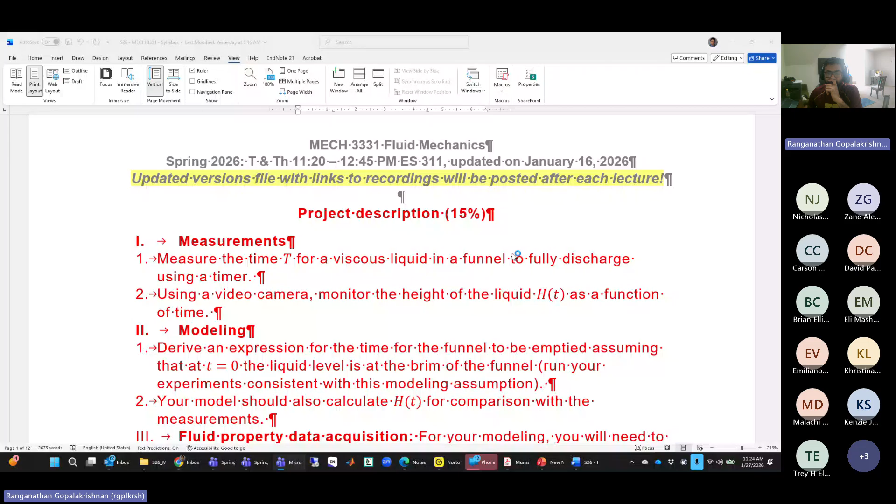So if this project is included in the course, we're going to have a grade structure that looks like this. There will still be 3 midterm exams. I might not have questions covering explicitly Unit 1, because the experiment I'm proposing with the funnel really draws concepts from Module 1, so we won't have a separate quiz on that. There will be 3 exams covering 2 modules each, and then there's the final.

Which I said was originally 45%. Now, if the project is worth 15, that would become 30. And I'm inclined to make the project go up to like 30% so that the final is just another exam, so there's less pressure. You can show up, take the exam, and it's basically a demonstration of what you've learned throughout the course. The project becomes something that's hands-on and will test you. I'm pretty sure that's how I designed it, so in my objectives, your objectives, both will be satisfied.

Sound good? I don't know about a full 30% for the course project, but I would be fine with like 20%. Okay, yeah. I was thinking - these exams contain 5 problems in 75 minutes. This one contains 6 problems in 120 minutes, so I'll try to tweak this. It won't be 15, it probably will be something between 20 or 25%, and the project will be the remaining. So that would make this what? If this is 20, that would make this between 20 or 25%.

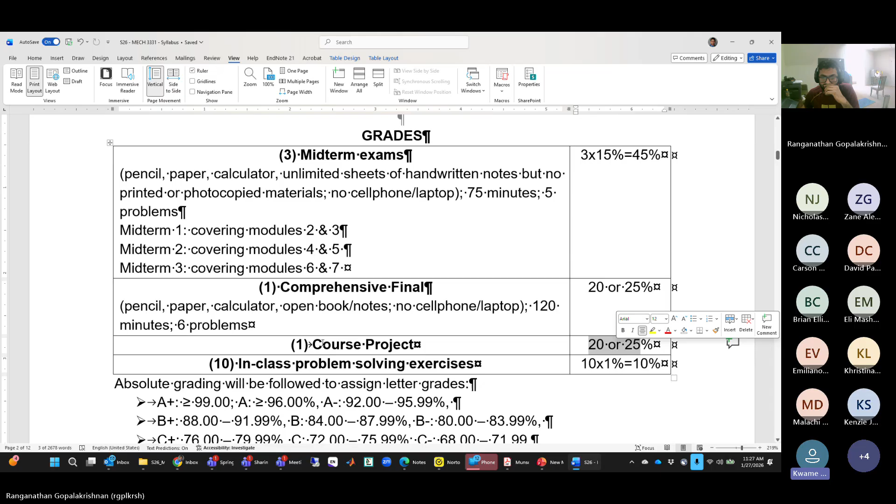And my second question was, with the questions we're answering about the fluid system we're going to create, are they going to be organized so that as we go through each section we'll be able to answer them more completely, so that we can start working on them now?

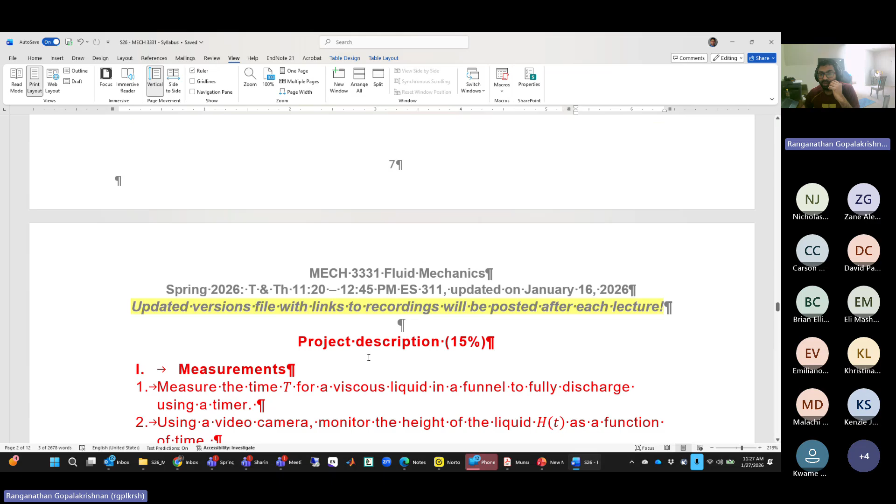My hope is to get you to do the hands-on work of setting up an experiment - a camera, funnel, liquid - and doing the image analysis. And on the modeling side, doing some derivation for the exact geometry of the funnel, taking into account the viscosity of the liquid, using control volume analysis.

The report writing part, I will release a template. It's essentially 3 or 4 pages. It will have specific questions or sections where it says enter this information, with a blank or given space telling you exactly what's needed. So you just fill that out, and that's it - you don't have to write a free form report, which would take much more time.

All right, thank you. Yeah, the goal is not to get you too drawn into report writing. The goal is to make you do some work, get your hands sticky.

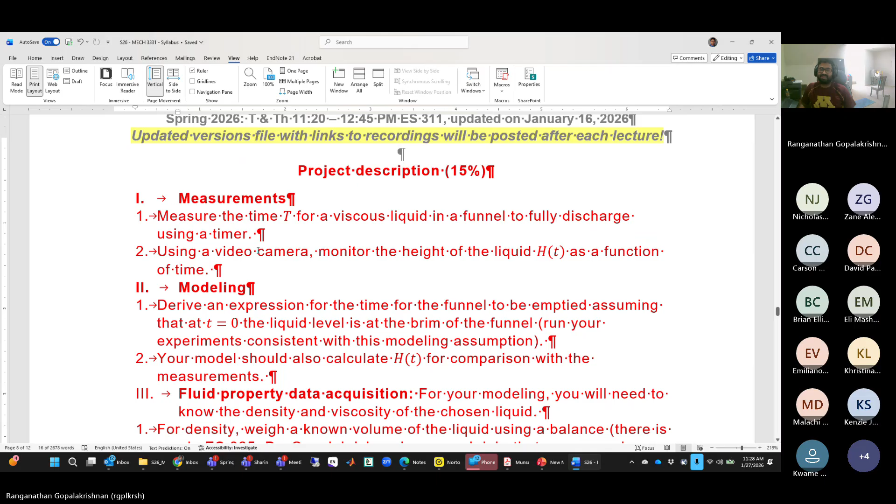All right, okay, so let's move on. We have been discussing fluid properties. We previously discussed up to section 1.5 in the textbook, which covers the ideal gas model - this was the last thing I talked about last time we met. So P equals rho RT is the ideal gas law or model. It's the equation of state that constrains the state variables - pressure, density, and temperature of a gas - under specific conditions or assumptions. There are a lot of assumptions; we're not reviewing all of those, we don't need all of them.

But the most important assumption is relative to the condensation point of the gas - the P and T involved need to be low pressure as well as high temperature. For example, if you're using this equation for superheated steam, it has to be much hotter than the boiling point so the chance of it condensing back is very low. As well, you can take nitrogen at room temperature and pressure, because nitrogen's condensation point is very low - it's exactly around minus 196 degrees Celsius at 1 atmosphere pressure. So if you're dealing with 1 atmosphere regular conditions at room temperature, nitrogen is a gas, and ideal gas is an excellent model for nitrogen.

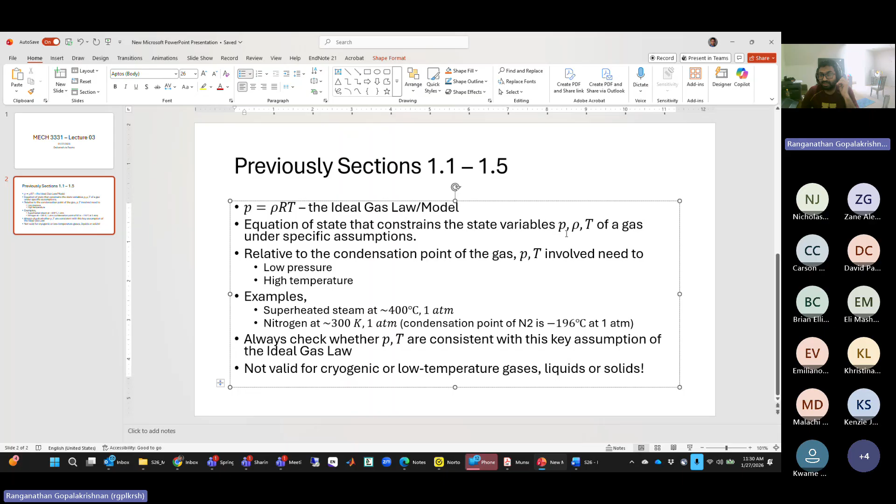So if I ask you a question - how would you get the density of water at a specified temperature? Any answers? Would it be its mass over volume? Yeah, you'll have to look up a data table where people have actually measured by weighing a known volume of water, recording its mass very precisely, and then telling you what the density is. That's the only way to know the density of a liquid if you were to look it up.

Okay, so the message is don't use ideal gas law, especially for liquids. It's completely inapplicable. Clear?

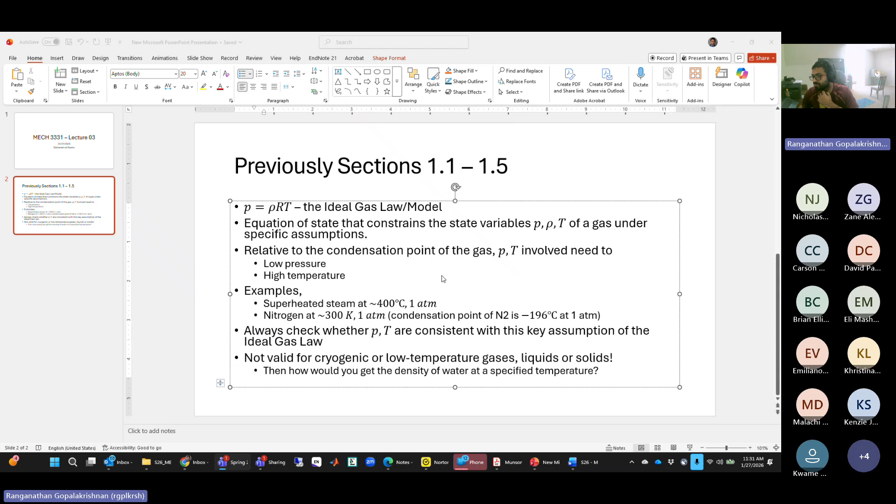Okay, moving on. The next important property we are looking at is section 1.6, viscosity.

So viscosity, you have a lot of daily experience with viscosity. Can you use some simple words to tell me what it is? Don't use any technical word like shear or anything. But what is viscosity in your thinking?

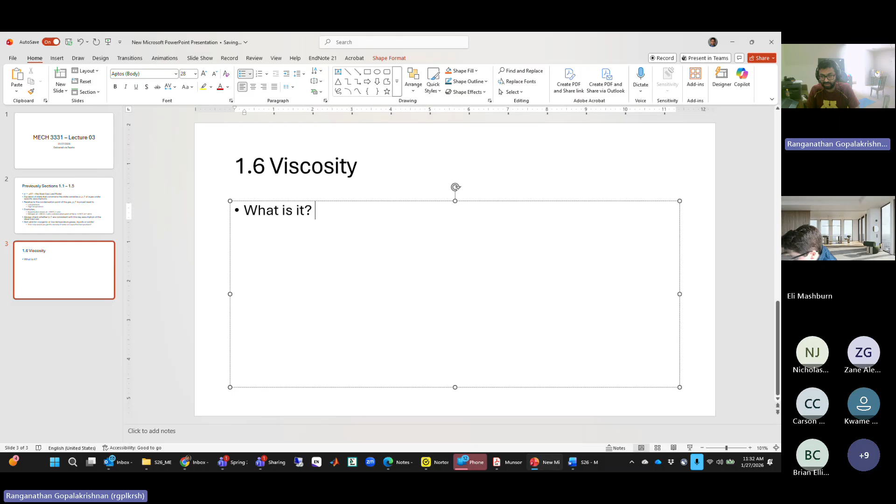The thickness or flow rate of a fluid, like how easy or resistant it is to flow. So when you said thickness or flow rate, what you mean is it is the tendency of the fluid to resist flow, or we can say a measure of how easily the liquid or fluid can flow, correct? Yeah. Okay. Any other responses? Thank you, Trey. Thank you, Kwame.

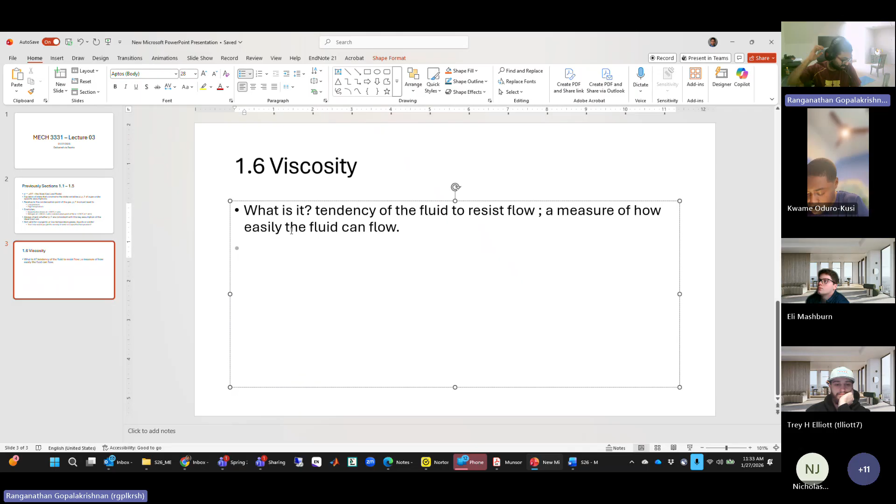How else would you be able to explain viscosity to somebody who is not a mechanical engineer? Fluid stickiness. Stickiness is not exactly viscosity, though it kind of is. What you mean by stickiness is kind of what he said before, because if it is sticky, it's going to resist flow. That's what I think you mean, correct? Okay, good.

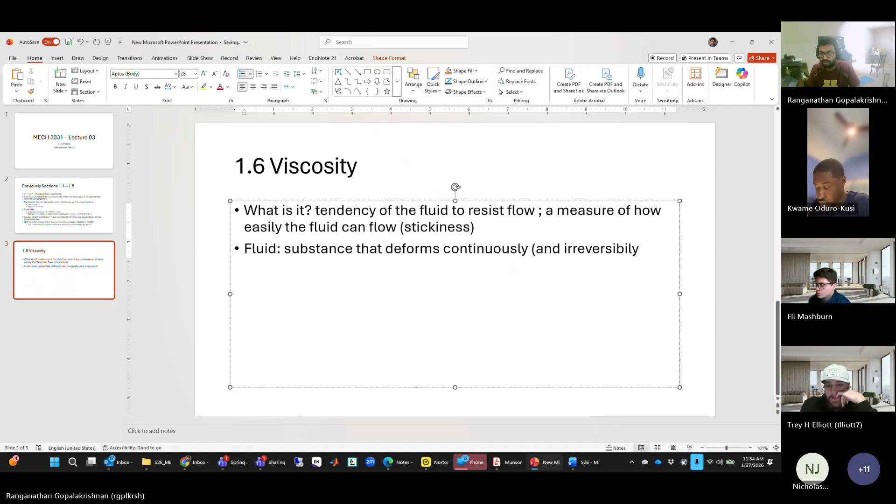All right, so the book talks about viscosity in a little more formal way, and we'll see that. So we talked about fluid. Can you recall the definition of a fluid from two lectures ago? A substance that deforms continuously. Very good. Substance that deforms continuously and also irreversibly when acted upon by a shear force or stress with no minimum threshold.

Okay, now when we talk about two liquids, consider two liquids. We'll take the familiar thing that we all know of, which is water. And we'll take something that's more resistant to flow, or more viscous than water. What can we think? Honey. Honey, perfect. Consider two liquids, honey.

So if you do an experiment that looks something like this, let's say you have an inclined plane, and you have a dripper which constantly drips water, and another dripper which constantly drips honey. They both start at the same time and start sliding down or flowing down. Which do you think would have flowed for a longer distance under this condition, where this incline is at some angle with respect to the horizontal?

Water, this would be water, right? If I didn't label this, you would come in and say this must be water and this must have been honey. If you were the forensics person investigating something, this is honey, this is water, right? Trey, can you tell us why honey would have flown a lesser distance?

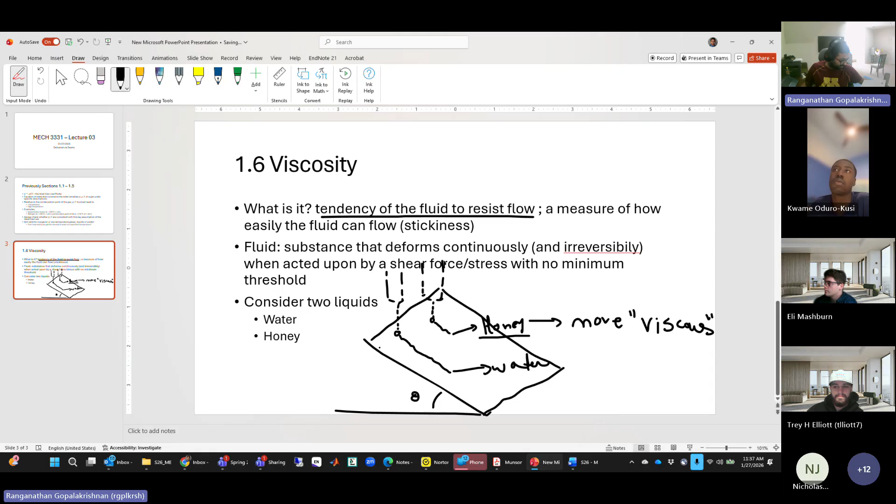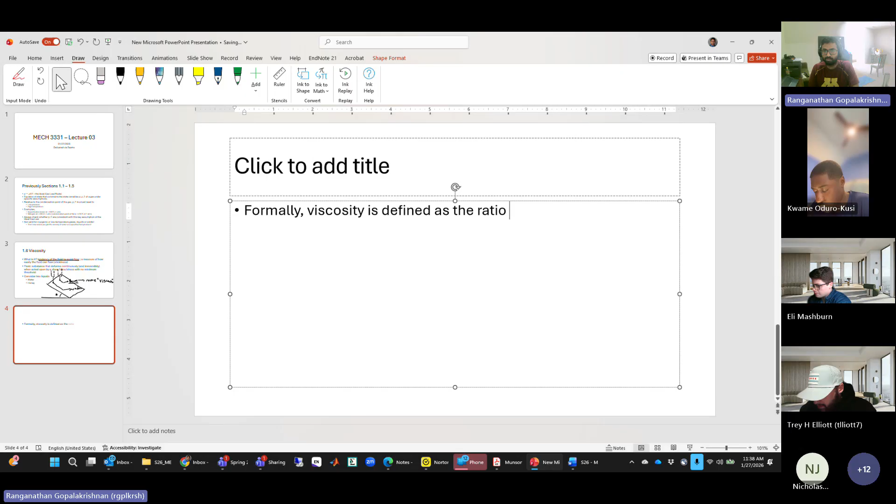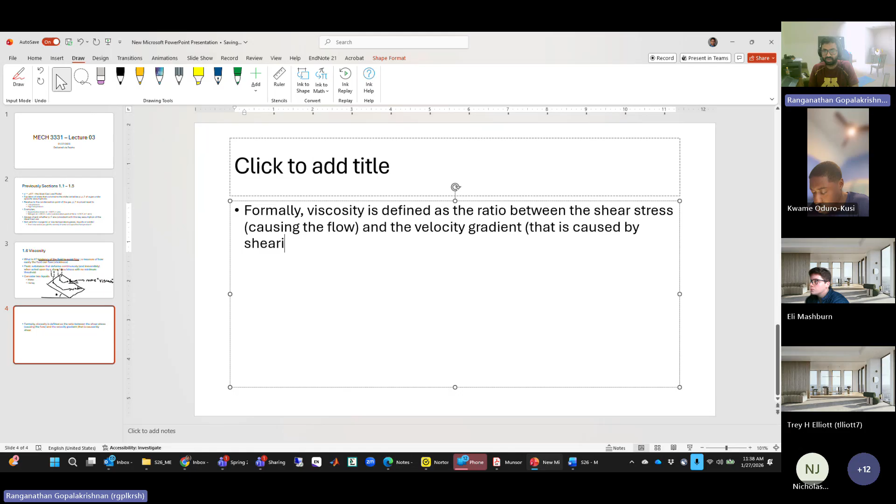Okay, so it's time for a formal definition. All right, so formally, viscosity, I'll write this in the next slide. Formally, viscosity is defined as the ratio between the shear stress, which is causing the flow, and the velocity gradient that is caused by shearing of layers. I introduced a term that I didn't define, but I'll come to that.

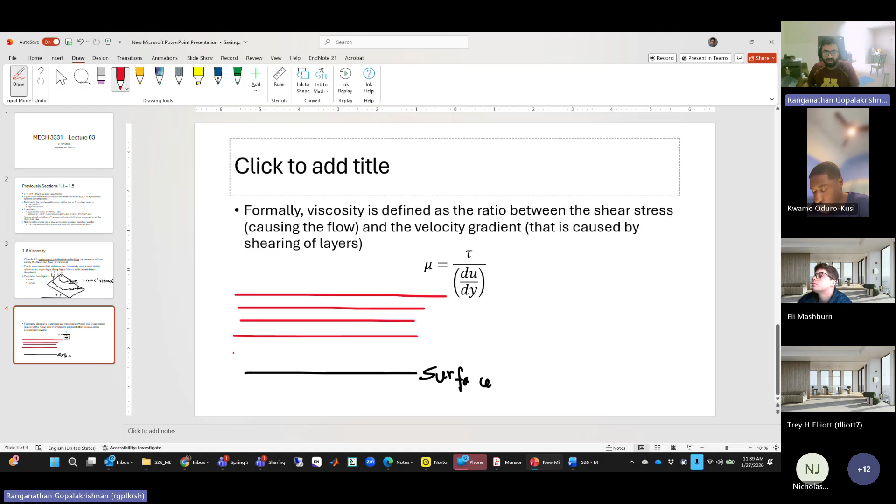So if I write viscosity, it is defined as the shear stress divided by the velocity gradient, and I'll have to tell you what velocity gradient is. Okay, let's write this down first, I'll draw a diagram. Let's say you have a liquid, here's a surface, a solid surface, and I'll use a different color for a layer of liquid. I'll denote this red with my fluid. These are fluid layers.

Okay, what is always true about anything and everything? This fluid is made up of atoms or molecules, correct? So if you just think about it, these layers are nothing but molecules that are arranged, well, not arranged, but the molecules are constantly moving around, but they are in a static equilibrium for now.

Let's say you come in and start applying a shear stress to the topmost layer. You apply a shear stress not to the middle layer, not to the bottom layer, but the topmost layer, and these molecules in the topmost layer will try to move along with you, and they will be displaced along the direction of the shear stress. You can imagine that if you shear the liquid, the molecules are displaced along the force.

Okay, if that is happening, what is the consequence of that to the neighbors of these molecules beneath them? When they move along, what do you think they'll do? What did I tell you about the nature of the force between these molecules?

You're also applying some kind of shear to the layers beneath. Henceforth, don't use the word shear, but tell me literally, when these molecules take a step to the right, what will happen to the neighbors beneath them, in the layer below?

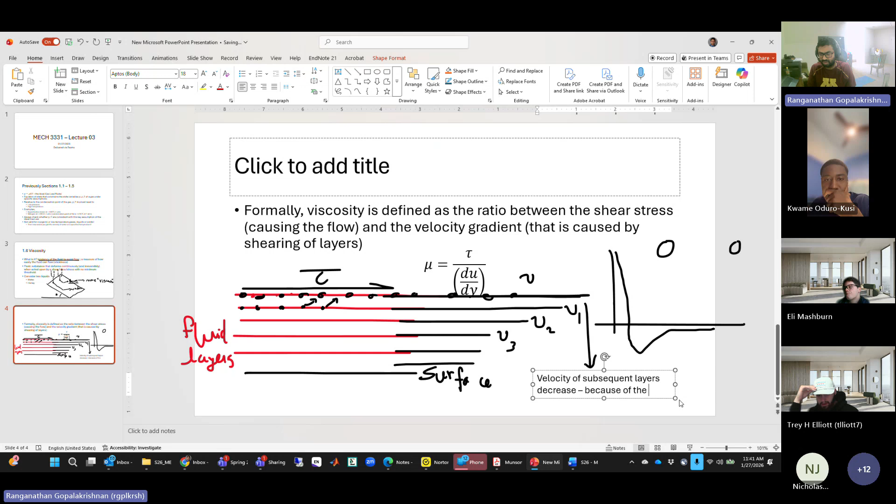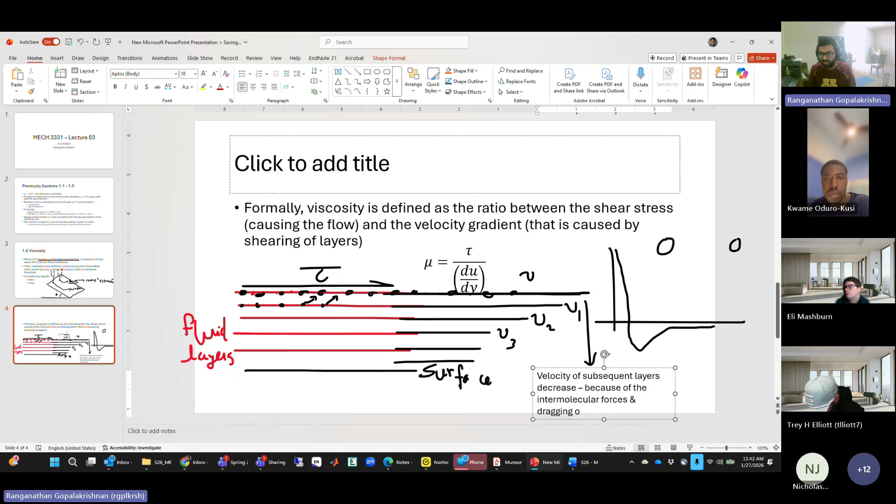So velocity of subsequent layers decreases. Do you agree with this? Because of the intermolecular forces, and dragging of layers below, do you agree with this?

Yes? No? Okay. So this shear force, which is the cause — remember the word cause and effect — this shear force, which is the cause, causes a velocity that is changing along this vertical direction. So if I call this direction y, this velocity is not constant along y.

Do you recognize that? So if something is changing along a certain direction, we call it with what term? What is the name of that change? If the velocity is changing along the y direction, it is a gradient along that direction. So we call it a velocity gradient, which is the effect due to shearing.

You do shearing, that is something you do. What you observe as a response from the fluid is the setting up of a velocity gradient, or the formation of a velocity gradient.

So this shearing is something that you control. This is external, meaning it could be you, it could be a machine, it could be a surface, it could be a brush, it could be a machine tool or whatever it is. This is external, which means you can set the force, and depending on what the fluid's internal mechanics is, or whatever its nature is, depending on the molecular structure — all the gory details we don't want to know — the velocity gradient is an effect that we observe.

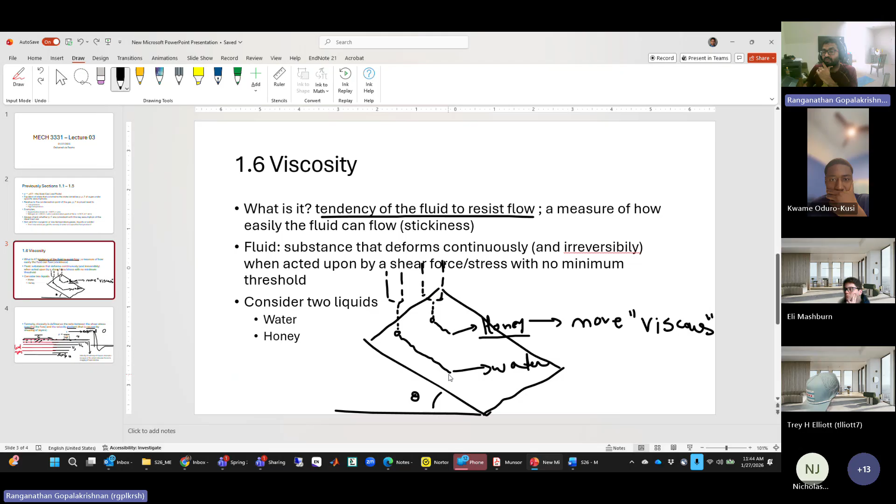You do the same experiment as before with honey and water. The same force is causing a lower velocity gradient in honey, whereas it is causing a higher velocity gradient in water, which makes honey more viscous than water, which is consistent with this equation here. In honey, this velocity gradient is lower, which makes the viscosity higher, and in water, it's vice versa.

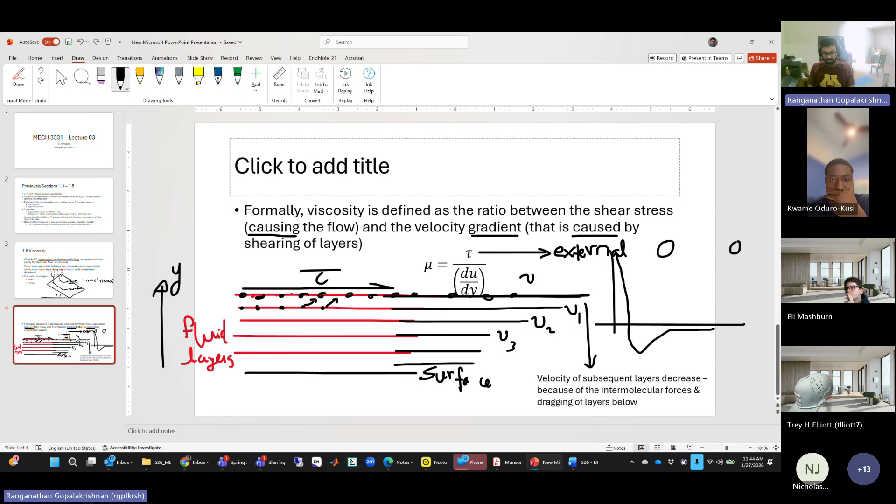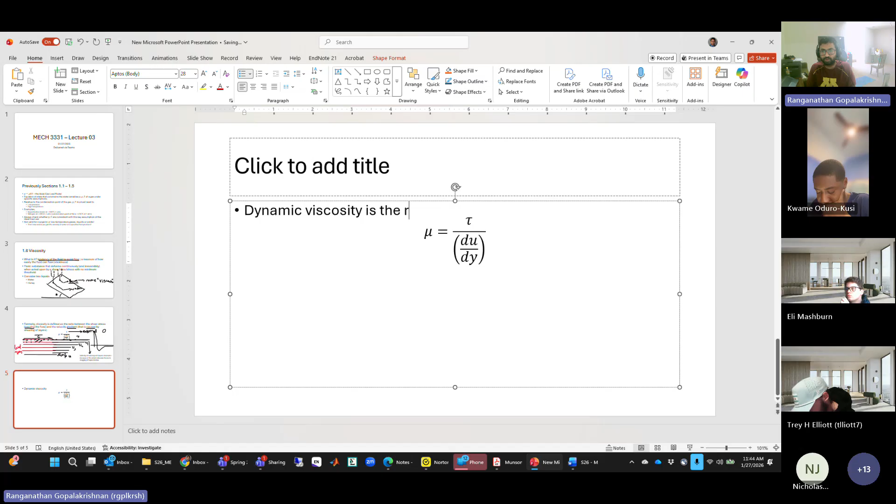Okay, so this definition here is for the quantity called dynamic viscosity. It talks about viscosity as a ratio of shear stress to the velocity gradient developed in the flow. I'll call this the effect, and I'll call this the action — sorry, yeah, cause and effect, cause.

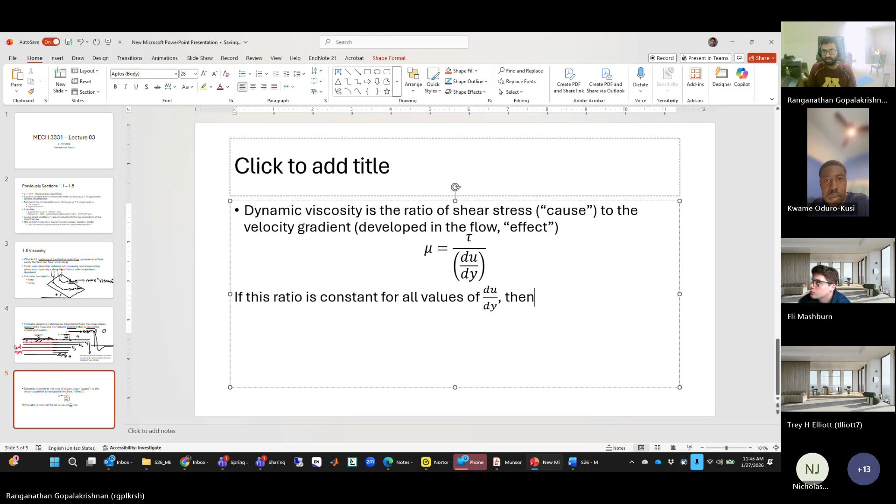So this is the definition you want to use: the viscosity is the ratio of shear stress to velocity gradient. And if this ratio is constant for all values of velocity gradient, then — sorry, before this sentence, I need to say du over dy, the velocity gradient —

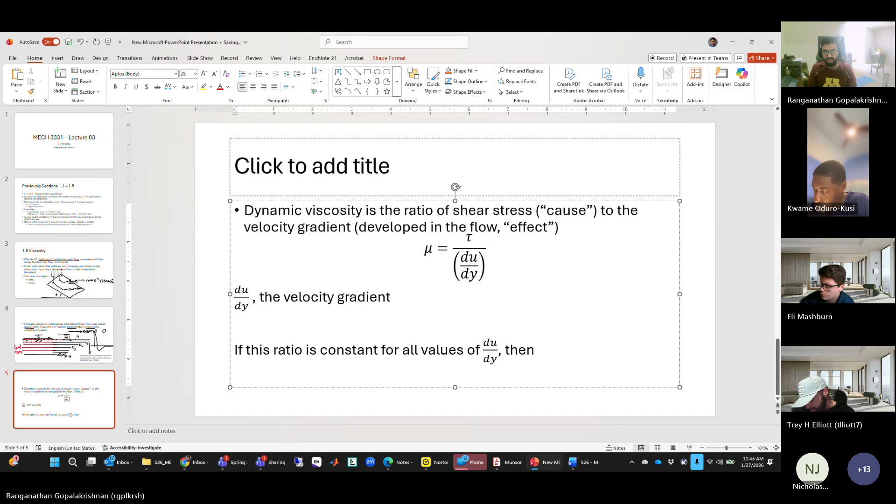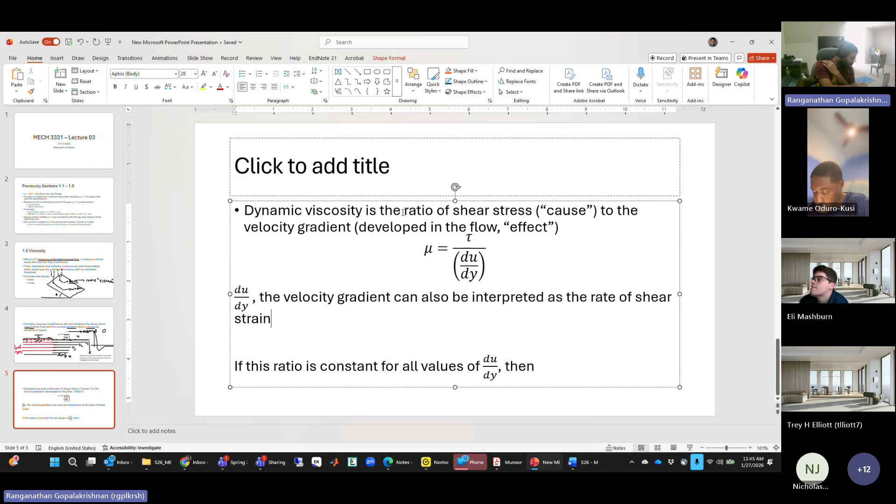The velocity gradient can also be interpreted as the rate of shear strain. Okay, rate of shear strain. How? We all know what is strain, right? You know what is strain? What is strain?

Change in length divided by original length, right? That's from mechanics of materials. Strain is change in length divided by original length, right?

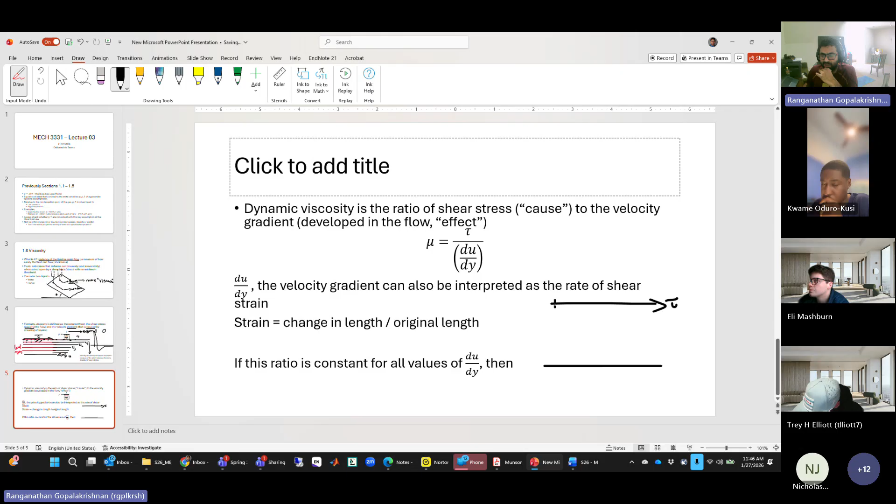So when you have a layer of fluid, let's say you have a solid surface, and then a layer of fluid which is getting sheared. Whatever molecule that is here at one instant is displaced to another location. So if you take this angle here, we'll call it delta, this angle.

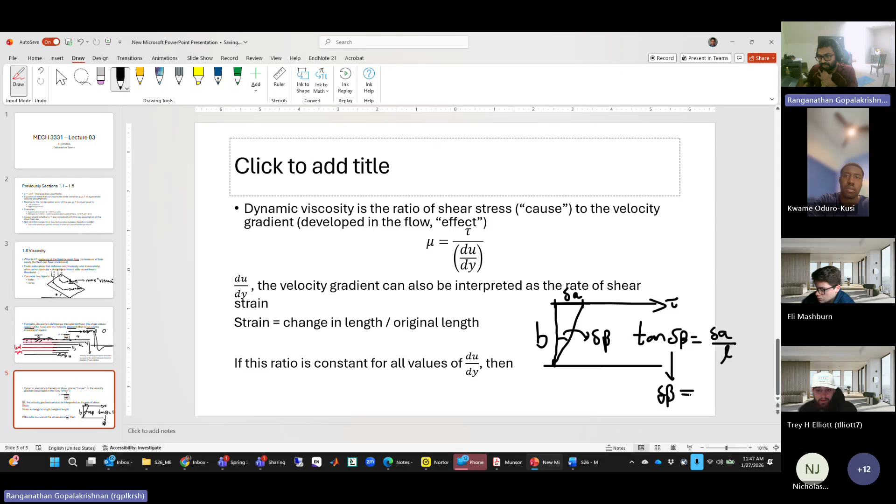I need to use a different nomenclature consistent with the book. This angle is denoted delta beta, this length is denoted delta A, and this distance is denoted B. So tangent of delta beta equals delta A divided by B. That's just trigonometry, ratio of opposite by adjacent is tangent. Since this angle is small, we approximate tangent of delta beta as delta A divided by B.

Delta A divided by B. With me so far? So is the shear strain the hypotenuse of the triangle, or is it delta A? Delta A - this is the change in length that you are producing.

Okay, so think about delta A. If you are moving this top layer at a certain velocity, delta A is simply that velocity multiplied by the time over which this is happening. If you are applying a shear stress and causing the top layer to move, how would you know it is actually moving? You would observe the velocity of that top layer because you control it.

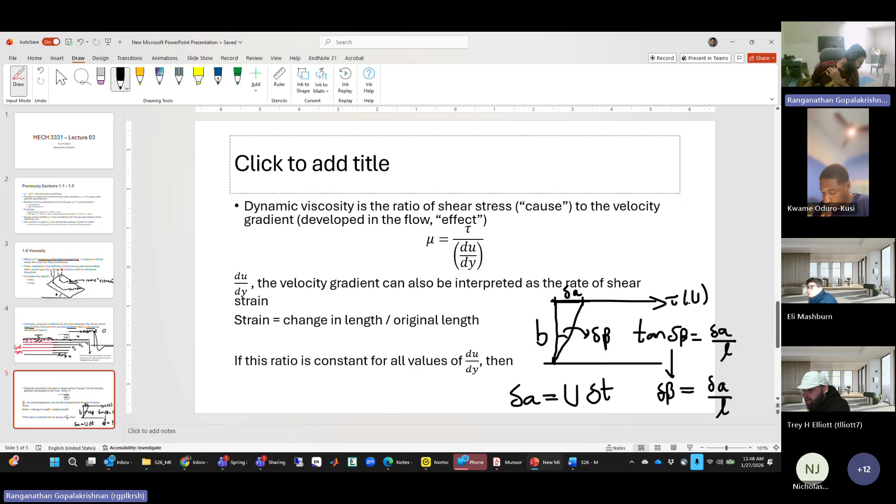It could be a rotating surface, or your hand, or some surface or a boat which is causing that shear displacement at a certain rate. We'll call it U, velocity. So we'll write delta beta - I'm going to continue this - delta beta is equal to delta A divided by B, which is U times delta T divided by B.

Remember, this delta beta is the angle. So we'll write delta beta divided by delta T is equal to U over B. U is the velocity of the top layer, and B is the thickness of the layer.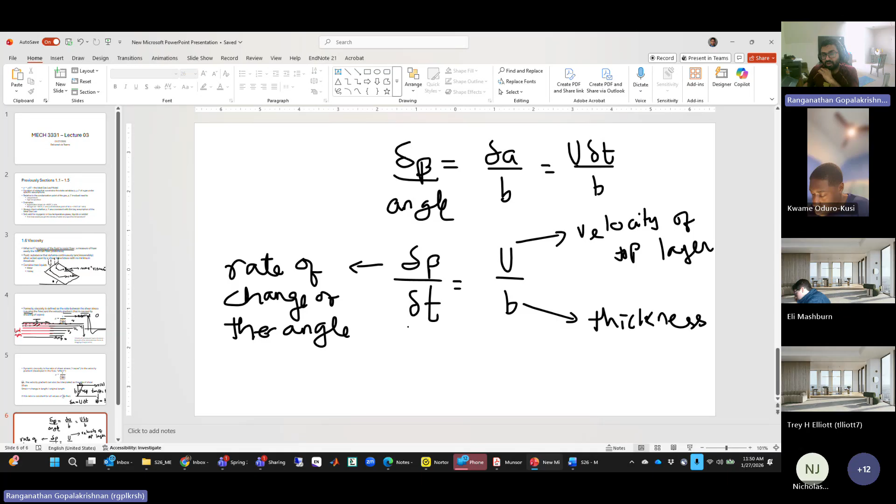So this is the rate of change of the angle. This delta beta is the change in angle, and when you divide that by the time taken, that becomes a rate. It's just calculus, going from a quantity to a change to a rate.

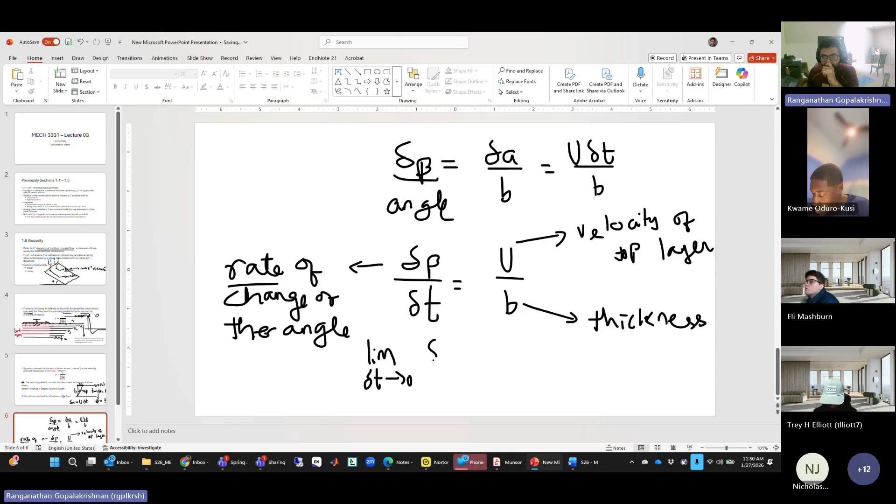In the limit that you do this for a very short interval of time, this delta beta over delta t - I'll use the symbol with three lines - is defined as gamma dot, the strain rate. This quantity, strain rate, is the rate at which that angle changes. But according to this equation, this is also equal to U over B.

All right, can I switch to the next slide? So we are at the point where we are writing strain rate equals U over B, which is like saying here is a layer of fluid with the top layer moving at U and the thickness of the layer being B. There are multiple layers.

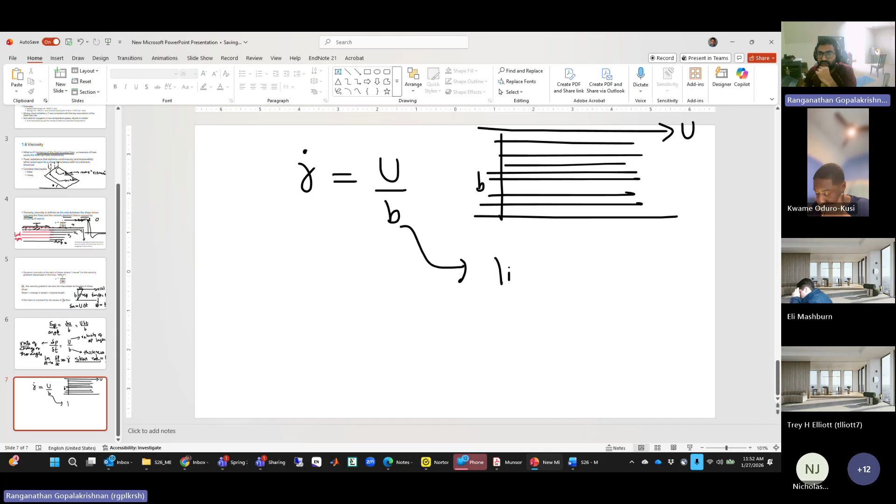And it doesn't make sense if B is really large. B has to be something differential. So in the limit that we make this very small, b? So that gamma can be defined at any point rather than for a finite layer.

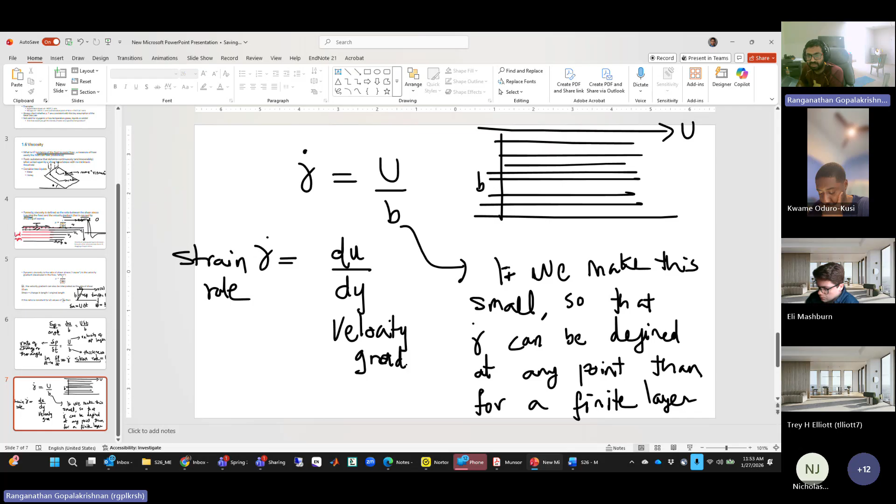So that said, gamma dot is equal to du over dy. For a small change in velocity and a small change in vertical height, the ratio of those two is the strain rate. So strain rate is directly the velocity gradient. Whenever we use the term du dy, we are referring to strain rate directly - these two terms are usually interchangeable. Whenever we say velocity gradient, it could also mean strain rate and vice versa.

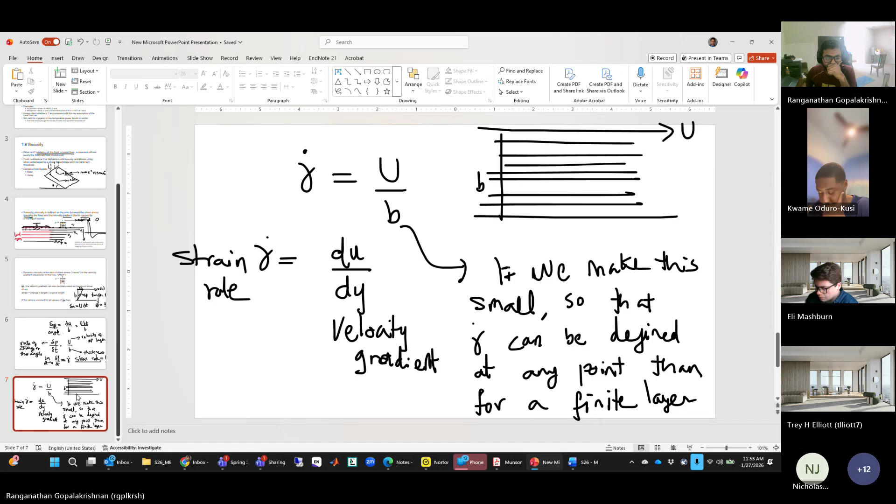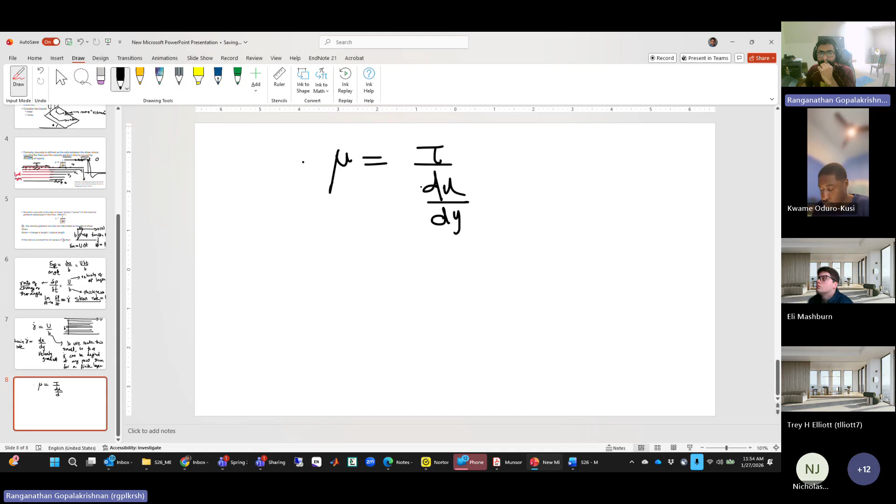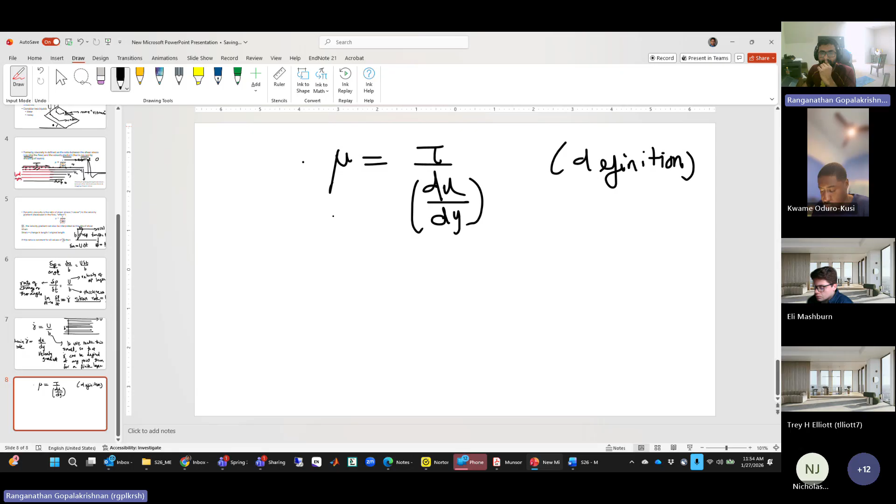Okay, so we have mu is equal to tau divided by du dy. This is the definition of viscosity. More commonly, if viscosity is known, we write tau is equal to mu times du dy, because this becomes a known property that you can look up.

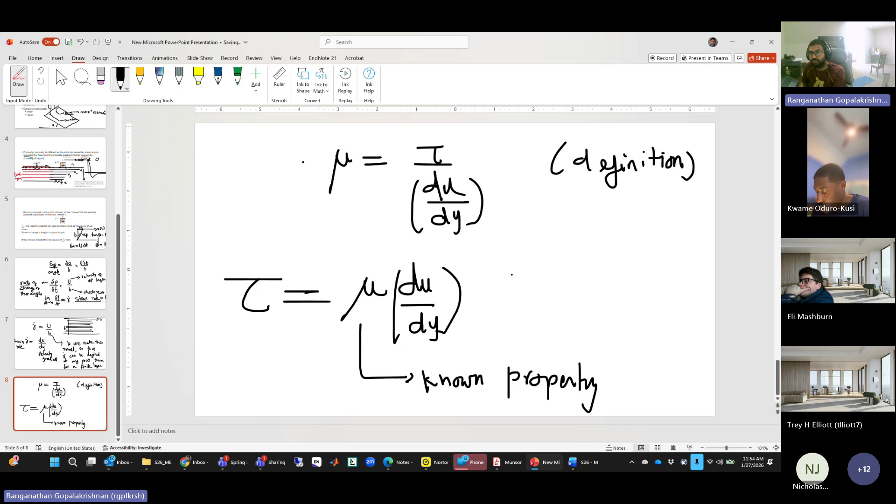If you are doing this for the first time, you need to do an experiment to figure out the viscosity of a liquid or fluid. But if that fluid data is already available, you can treat viscosity as a known property and then measure or calculate the velocity gradient, which becomes an equation for shear stress, a way to estimate the shear stress. This ties back to the original experiment with a water dripper and a honey dripper. The honey flows to a shorter distance than the water because for the same shear, the honey is more viscous - it gets a smaller velocity gradient, and vice versa for the water.

Questions before we go on to classify fluids based on their shearing behavior. Is it clear, not clear, intuitive?

So Kwame, you work with biomedical projects, right? So when they say the classic phrase 'blood is thicker than water,' what are people referring to? Is it the density or the viscosity? Probably the viscosity, but think about that, because thick could also mean it's heavier.

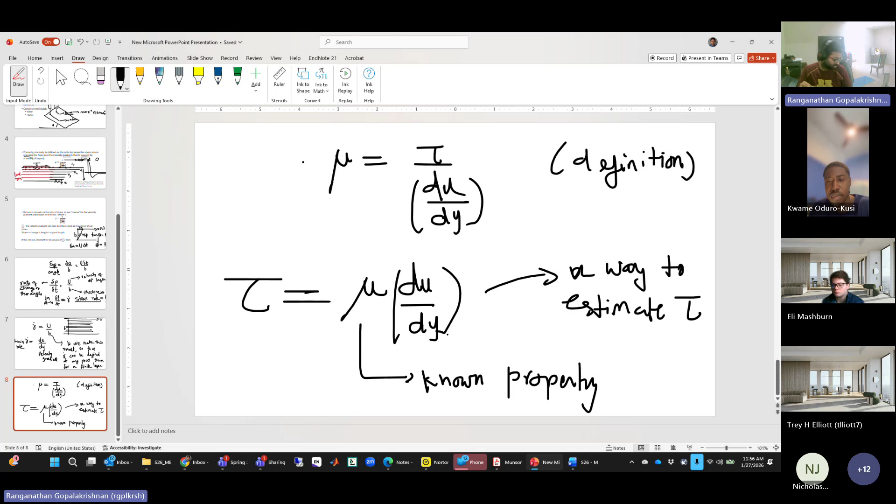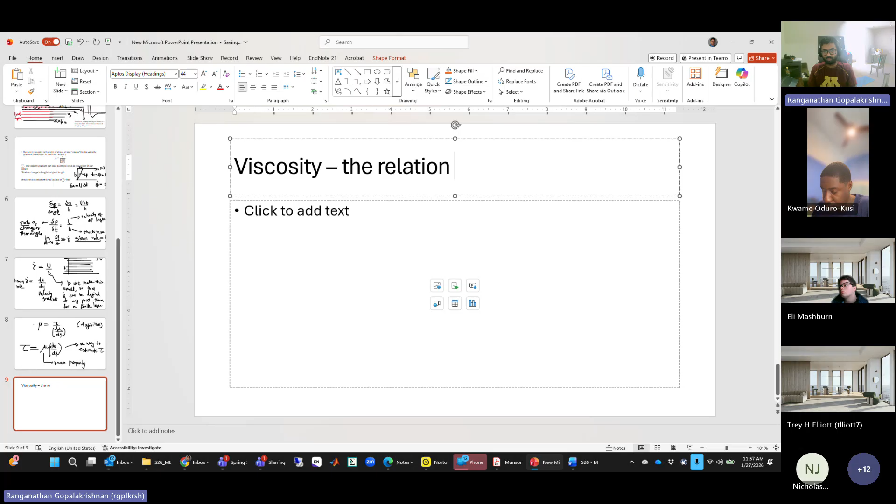We have introduced one important property of liquids, which is viscosity. So what do you know about viscosity? I know the word non-Newtonian has been thrown around. The relation between shear stress and velocity gradient, or strain rate.

What do we know already? Can you just say anything that comes to mind? You don't have to be exact about this. Don't try to polish your answers.

Could you repeat the question? When we say viscosity, let me give a clue. What all comes to mind? How does viscosity depend on temperature? If you increase the temperature, will a fluid become more viscous or less viscous?

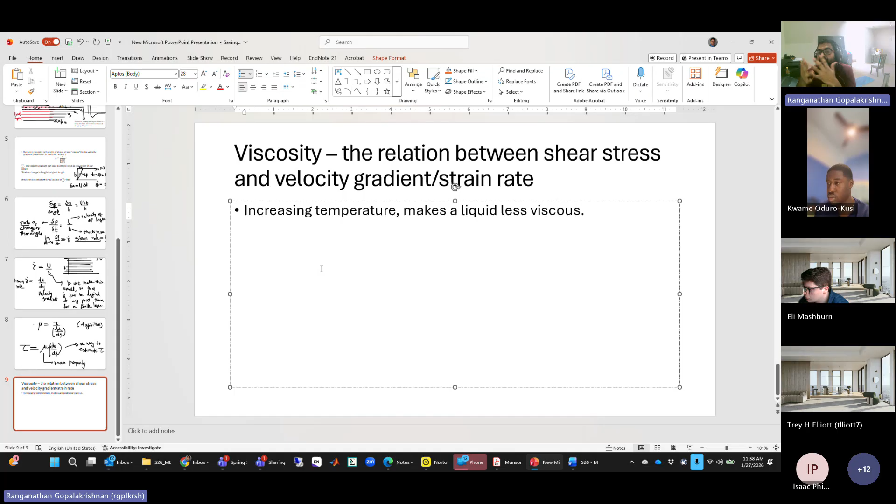I think it's less viscous. Okay, increasing temperature makes a fluid, especially liquids—we'll talk about gas separately—less viscous. Good, I agree. Why would it make it less viscous, or less resistant to flow, which is what viscosity is?

Because it loosens the intermolecular bonds, right? I guess, because thermal energy weakens molecular bonds and makes their motion more random and less resistive to directed motion, or shear, right?

Thank you. Now, if you increase the rate of shearing, this quantity du/dy is called the rate of strain or strain rate, because it tells us how drastically the velocity is changing or differing between fluid layers. A high value of du/dy means rapid motion of the top layers relative to the bottom layers. Would you agree? That is, if this value is high, it means in the vertical direction, velocity is dropping drastically.

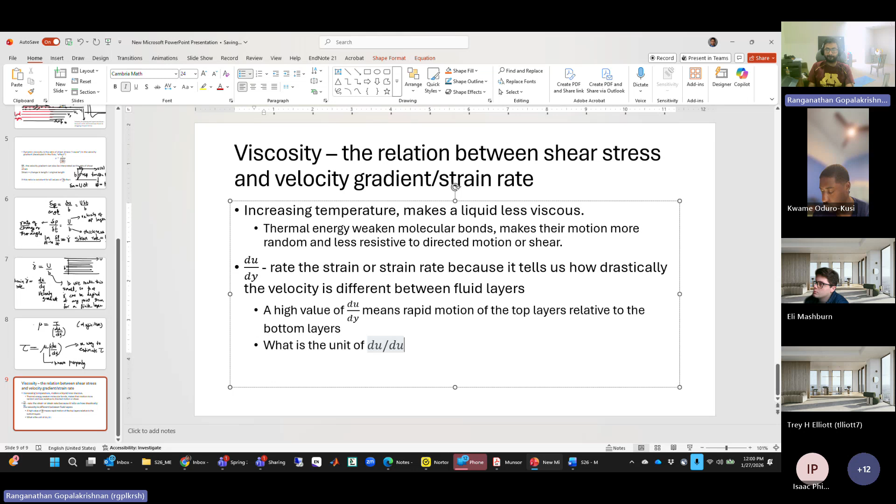Now what is the unit of du/dy? You're all experts in units and dimensions by now, right? So how do you get the dimensions of a quantity which is a velocity divided by a distance? That will be L T power minus 1 divided by L, which is T power minus 1, per second, right? The unit of du/dy, strain rate, is per second.

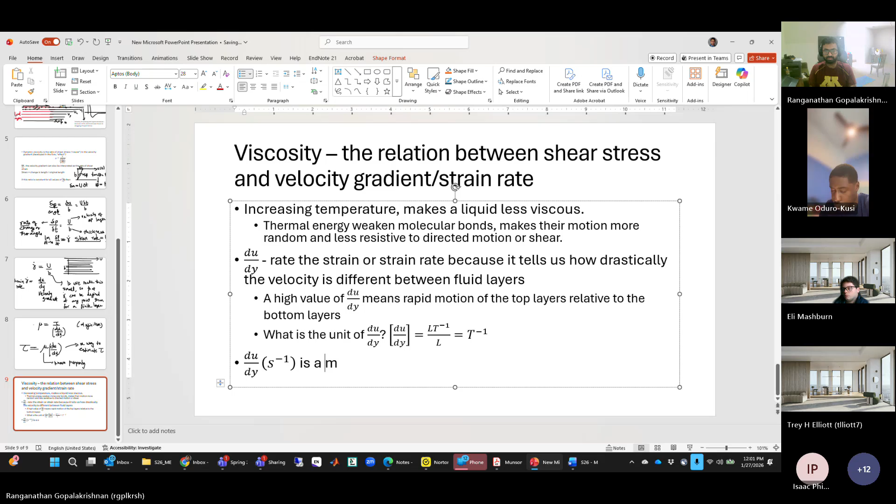So this du/dy, with units of per second, is a measure of how rapidly the fluid is being deformed. Okay, example time. Can you tell me some situations in which the fluid deformation is very slow, as opposed to other situations in which it's much faster?

Not about resistance—don't compare honey with water or two different liquids. For the same liquid, consider a high flow or high shear and a low shear, or a high speed and a low speed situation.

When magma is flowing down a volcano, it starts off very quickly, but then as it cools, it becomes very slow.

Magma is a fringe example. Can we consider some situations which are more relatable, like water, engine oil, hand soap, or toothpaste—something you can quickly connect with?

I was actually going to mention engine oil. Especially now, your engine oil is more like a gel, and then as it heats up due to the work of the engine, it becomes a thinner liquid.

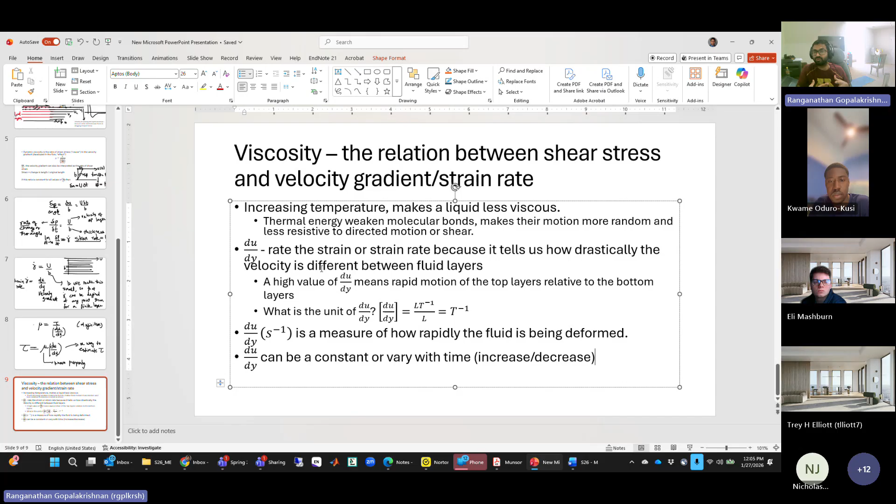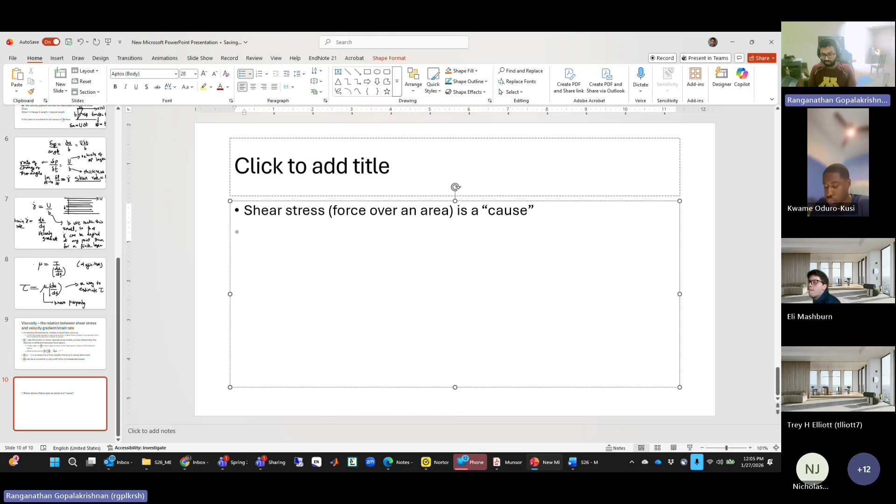Now when you do an experiment or when you are in control of a situation, what is it that you get to do, and what goes into the fluid, and then the fluid does something? So what are you in control of when you're running an engine, or having a stick, or applying a force? You are in control of the force that you can exert. You can apply a force to a liquid, and the liquid has its own internal molecular structure and mechanics, so it will have a response, and that's what you see as a velocity gradient. So recall this: the shear stress, which is really a force over an area, is a cause, meaning you do that. It's your action. And then the velocity gradient is an effect.

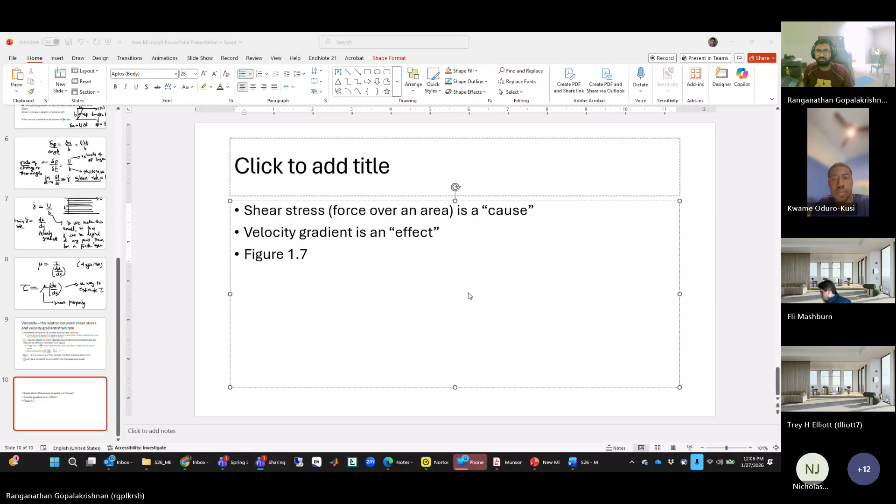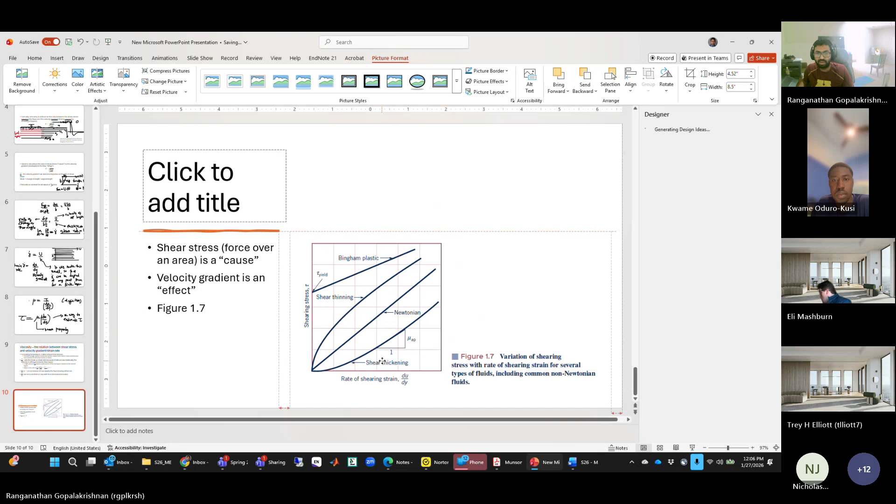So this is a matter of observation. If you look at figure 1.7 in your book, I'm going to paste a copy of that figure shortly. Everybody can see this clearly? Is it big enough? Okay, so if you look at figure 1.7, there are some fluids for which the relation between tau and du/dy is a straight line. It just remains the same throughout as you keep increasing the force or shear stress, the response of the fluid is the same. But there are some fluids which get progressively easier to deform - for the same force, you get a larger deformation - that's shear thinning. Then it becomes progressively difficult to deform, which is shear thickening. To get the same deformation, for the same force, you start getting lesser deformation.

Now why would that be the case? So I'm going to write down what I said. Some fluids have a linear or steady, predictable response to shear. Their resistance, that is their viscosity, doesn't change with strain or with further deformation. These are the ones we call Newtonian. So somebody used that word Newtonian in the very first lecture about fluids and viscosity - I forget the name, but they were perfectly right to use the term. What the term means is the resistance of the fluid doesn't change with continuous deformation. It doesn't get progressively easier or more difficult; it just remains the same where we started. It's like water - water is a classic Newtonian fluid.

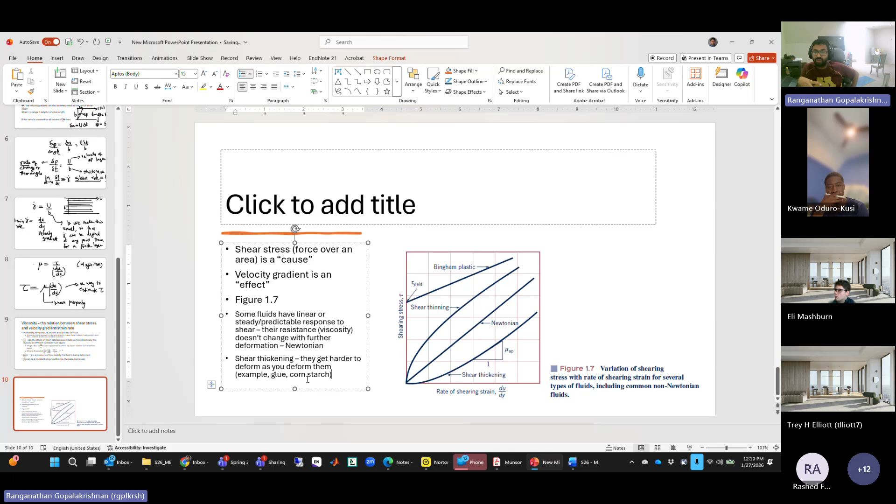Like a glue? Louder, please. A glue? Can you please elaborate what happens when you start stirring glue? The more you mix it, the stickier it'll get. Yes, and that is - you put a stick and stir the glue, and somehow the molecules, I don't know if they adhere to themselves, but as you move on they just don't want to go around. It starts getting progressively difficult to make further rotations of the stick. Okay, so that will be an example of glue. You can even try this with cornstarch - if you mix cornstarch in water and then start stirring over time, you will form something that closely resembles jelly, which is what glue also kind of tends towards.

Okay, all right. What examples can we think of for fluids that get progressively easier to deform as you go? Excuse me, I have a question about the glue example. Yes.

I think what I understood from what you're saying about milk and flour is that these are compounds, a mixture of several different things. So what's the difference between that and glue? In the milk example, there's protein, fat, and dissolved sugars. If you keep stirring or boil the milk, the fat rises and you extract it. What's left behind is very close to water, basically water with some lactose, so it doesn't have very different properties from water, which is Newtonian. You can stir skimmed milk and won't see that effect.

The glue, on the other hand, when you squeeze it out of a tube or a bucket from the factory, is a liquid, but it's in a state where it's not being deformed. The molecules have a certain initial configuration, and as you start stirring them, over time the molecules intertwine in a way that makes it progressively harder as you keep changing their positions. If you do this to an extreme, the whole fluid will seize, like a big cake or jelly that can't really be stirred. That's what makes it shear thickening.

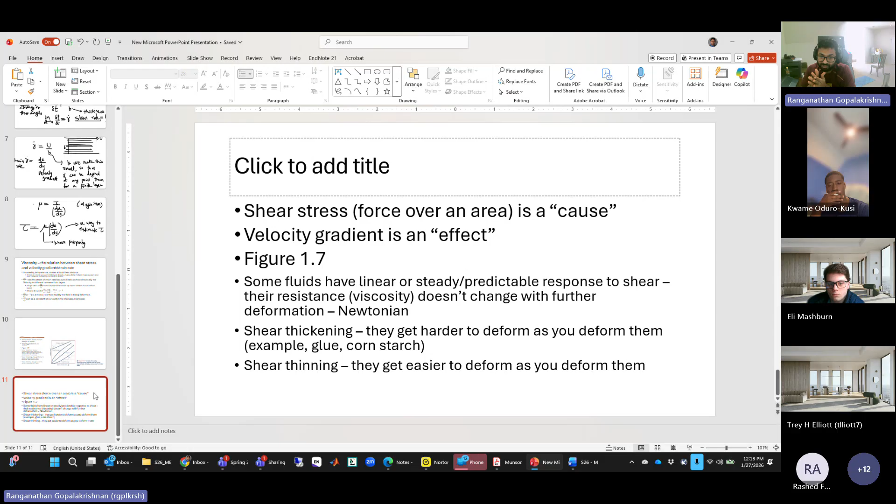Any examples? Would lotion count? Yeah, I would think so. The book talks about paint as an example for shear thinning. I would consider lotion too, because as you use your hand to spread the liquid, it becomes easier, definitely. So we'll list them as examples: lotion, especially that which is initially liquid to begin with, not something in a paste-like consistency.

Paint. And then there is a class called Bingham plastic. The classic example is toothpaste, where it is a solid until a threshold shear is reached. After that, it behaves like a liquid or a fluid.

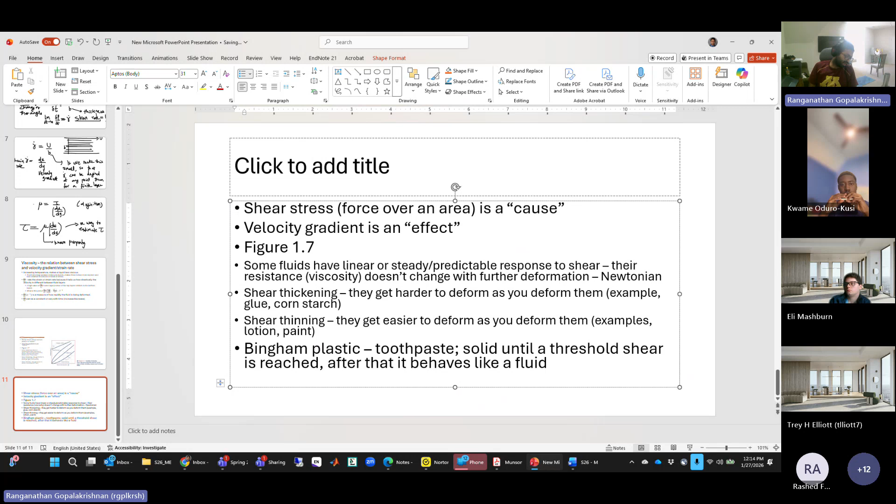So these are all types listed in figure 1.7, which you should be aware of or have a qualitative understanding of as you encounter different fluids in real life. In fact, in the project, if you use maple syrup, cornstarch, or hand soap, or any of these thick viscous liquids, they are most likely not going to be simple Newtonian fluids, but somewhere between shear thinning and shear thickening, so they'll have some complex behavior.

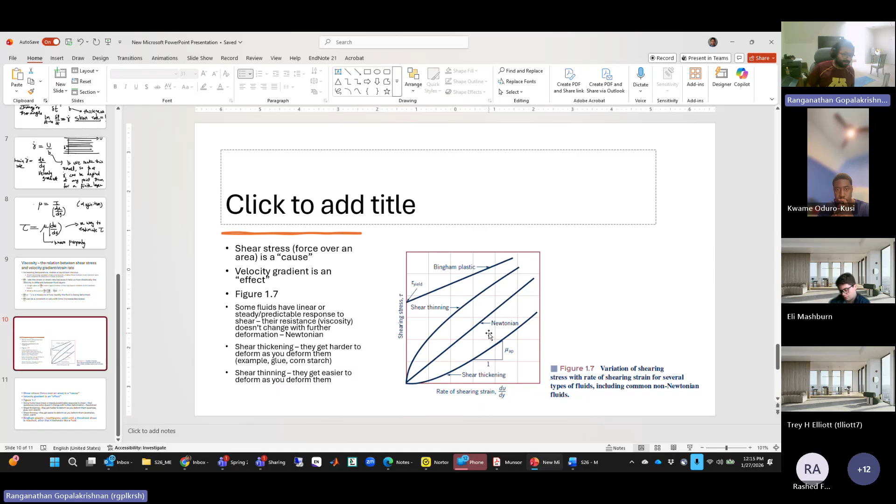The point of the project is to get you to handle them, do a measurement, do some modeling, and learn from that. So it won't be perfect, but it'll teach you something. Are we okay? Can we move on?

All right, so the next thing we want to know is that viscosity has a temperature dependence, and how you would do this is to measure viscosity at various temperatures of interest and summarize the data into a fit for easy use. By fit, I mean a regression fit. I'm sure many of you have taken numerical methods, so you understand what we're referring to, basically an equation that describes the data. So mu equals C times T to the power 3/2 divided by T plus S.

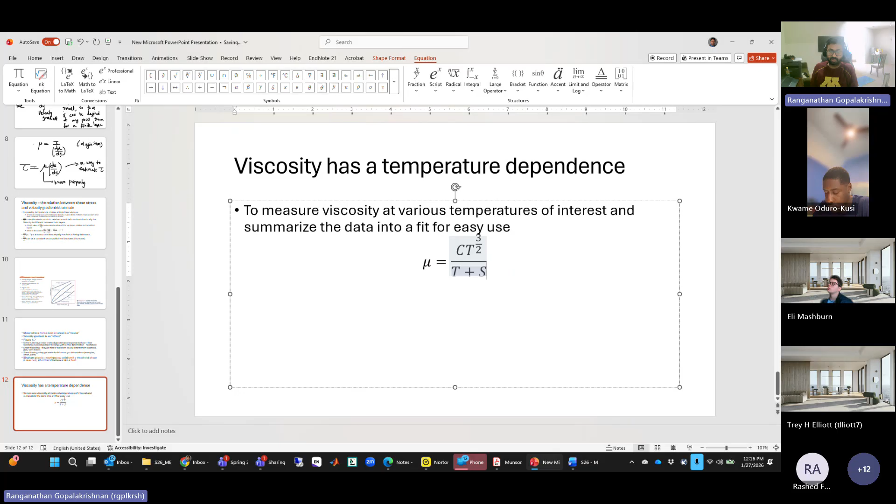This equation is called the Sutherland equation. This is an example of an empirical fit, not a fundamental law of nature. Can you tell me what that statement means? It's an empirical fit and not a law of nature.

What is an empirical fit? What is empirical data? It's like experimental, this equation was derived from observations. Exactly, empirical, very nice, empirical can also be written as observational. It's a fit of observed data. It is not derived from some basic theory or fundamental law of nature, which means there could be exceptions, fluids whose data don't fit this model.

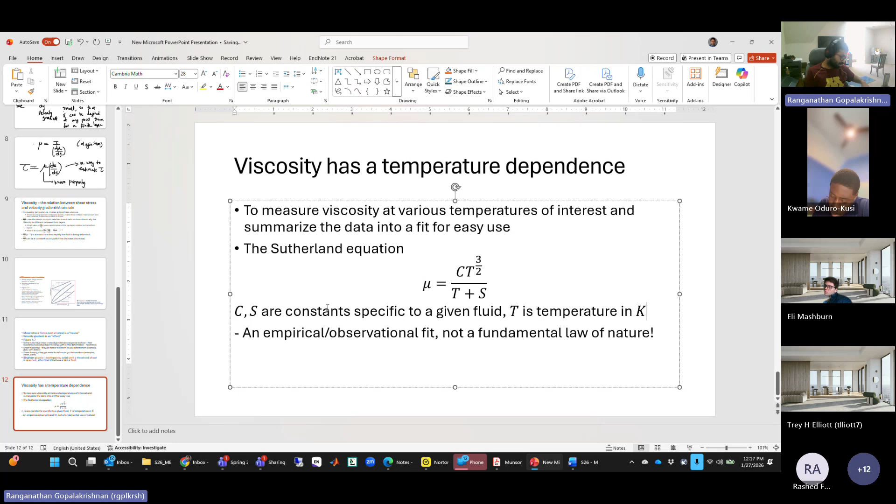As long as the data is available, in this equation C and S are constants specific to a given liquid or fluid, and T is temperature in Kelvin. So for a given liquid like water, there will be a value of C and S that you can look up and use to calculate viscosity as a function of temperature.

So if in the exam you're asked to calculate viscosity or use viscosity in a multi-step problem, you'll be told to use Sutherland's equation, maybe even provided the equation and the constants that come with it. So you should understand that viscosity has a temperature dependence, and that can be calculated using Sutherland's equation if you know all the parameters needed.

You don't have to memorize the equation, or know the constants by heart, but what you should know is that viscosity depends on temperature, and you have to account for it. If you just miss that and use a viscosity or temperature that isn't corrected for temperature, that would be incorrect. Okay, questions before we move on?

So if you look at table 1.8 and also table 1.6, you have the properties of common liquids and gases, which include density, viscosity, specific heat, whatever. So tables 1.6 for liquids and 1.8 for gases give you a table of density, viscosity, specific heat data. So at least for the practice problems, you need to just look at these and use them whenever you need them. And if you don't have any data in this particular table, there is always the internet. You can look it up and use it in your practice.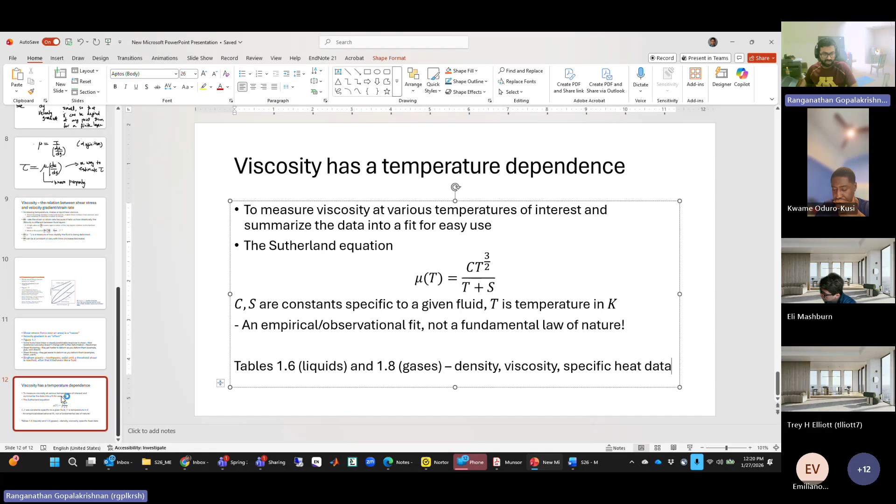So far we have been using this word fluid to collectively denote liquid and gas. It's now time to ask what is the difference between liquid and gas. Anybody to start the discussion? You know this, tell me intuitively what is the difference between liquid and gas, then we'll worry about being exact and everything.

Gas has a higher energy state, more thermal energy at the same temperature, or in other words the molecules are loosely bound than a liquid, so they have more freedom to explore around the space. Okay good, which is okay, what is the consequence of that? They have more energy, so more freedom.

So what's the most visible difference between a liquid and a gas? You know this. Liquids have a fixed volume, whereas gases tend to fill whatever volume they're in, fill the entire volume available to them.

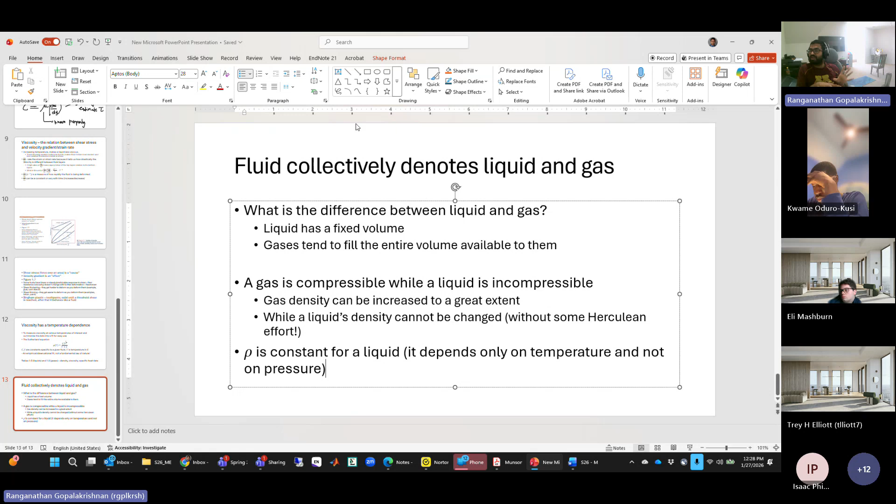For gas, it is different. Is compressibility essentially being able to force the atoms of something together without changing its properties? Yes, it's almost that. I'll just say it a little bit differently.

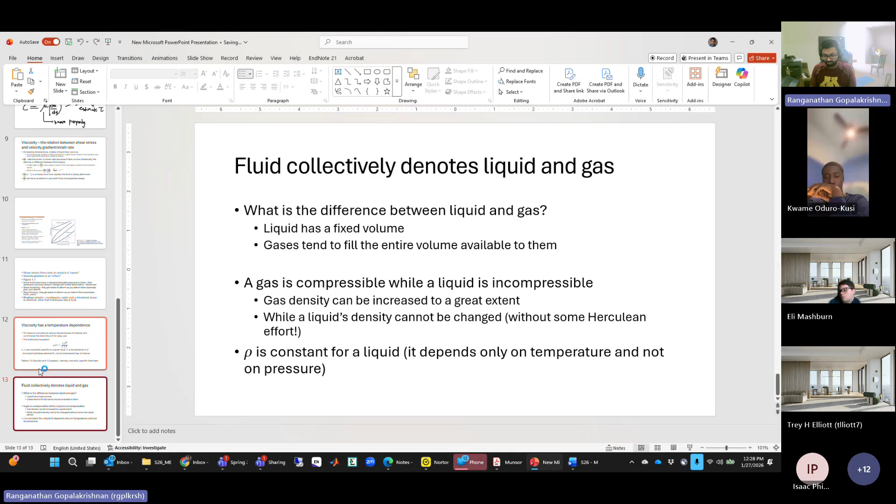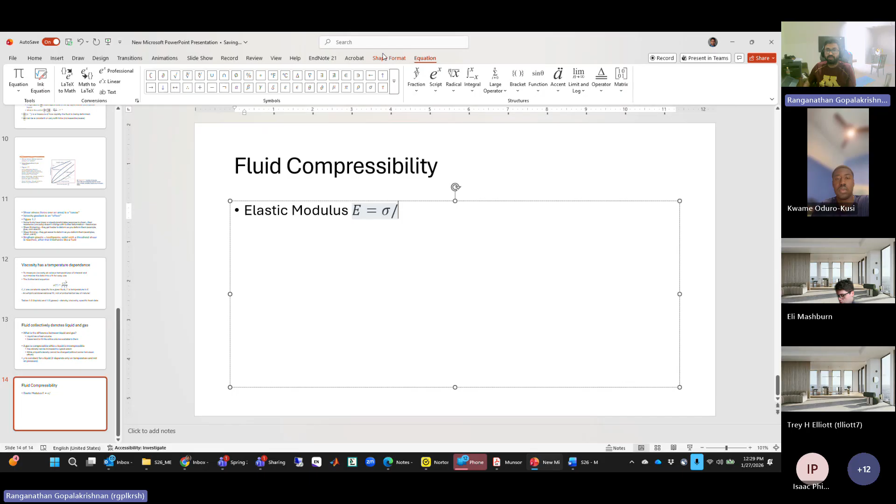So we are coming to fluid compressibility. Just for clarity, what is elastic modulus? Anybody from your previous classes? Elastic modulus E is what? Stress over strain, right? Any modulus of strength is stress over strain. And as you know now, stress is the cause and strain is the effect.

When it comes to length, or linear deformation, we talk about elastic modulus. If it is shear force, we talk about a shear modulus, let's call it Y. And Y is equal to shear stress divided by angular strain. When it comes to volume, we use the word bulk modulus. How would you define bulk modulus? By the same analogy.

It's like a radial pressure, the pressure all around the object. It's just pressure, right? Pressure is always normal. And what you're saying is radial, all around. At every point, pressure is normal. Yeah, and we'll see why in the next unit.

It's basically the pressure that you are squeezing it with, call it P, divided by volumetric strain. What is volumetric strain? Well, what is linear strain? Change in length divided by original length. What is volumetric strain? Change in volume divided by original volume.

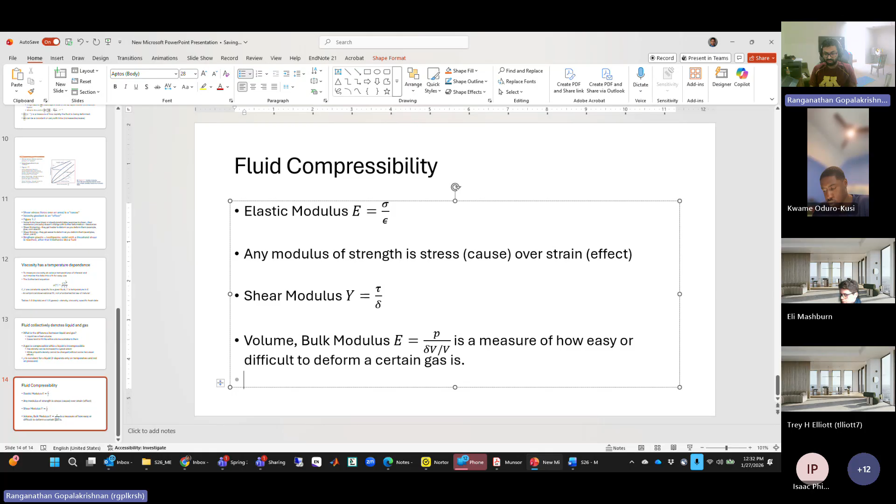Okay, quick question: what is E for a liquid? Based on our discussion so far, and this definition that bulk modulus is the pressure squeezing the gas or liquid divided by the change in volume, what is E for a liquid?

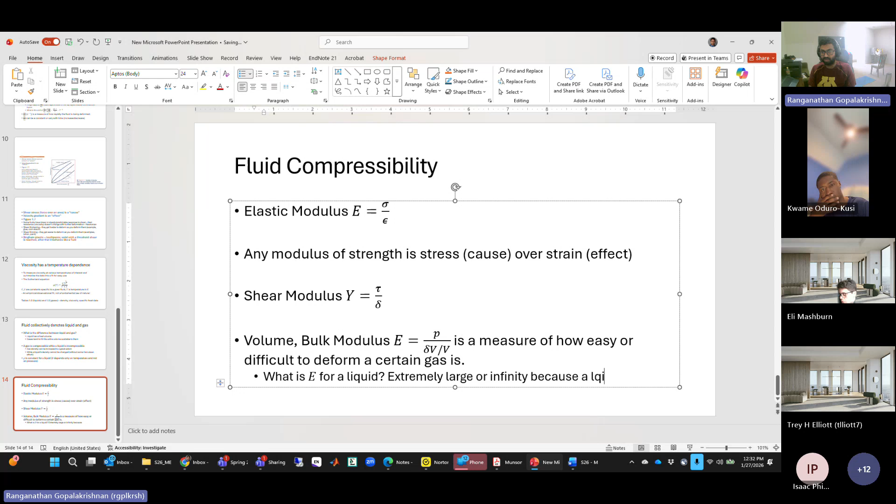Is it undefined because there is no change in volume? Well, not undefined exactly. Yeah, you can say undefined, but it's very large, or extremely large, or infinity, because a liquid does not compress or undergo any change in volume, which makes this delta V... if nothing changes, what is the change? Change is 0, which kind of implies E is practically very high, or undefined.

So don't think about defining bulk modulus for liquids. Bulk modulus is mostly a property of a gas rather than a liquid, and it's something you can look up, and it's what gives, or quantifies, the compressibility of a gas.

In this course, we are more heavily favored towards liquids. We deal with liquids in our problems more often, but do remember that liquids are incompressible, while gases are compressible, and that is measured using the bulk modulus.

I have a question. Can gas be compressed into a liquid? Yes. If you apply a lot of compressive stress, you can condense a gas into a liquid, but that may or may not be accompanied by a change in temperature.

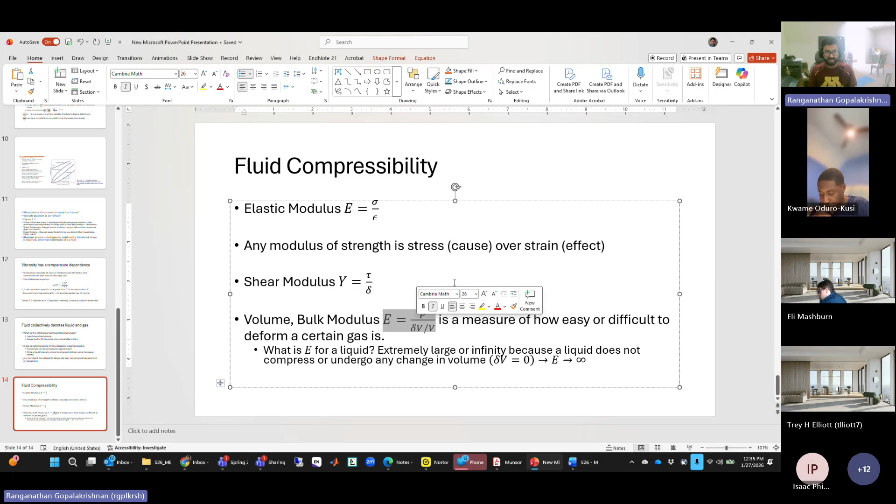Okay, so this is as much detail as I want to talk about in unit 1 or the introduction, where these are the fluid properties we realistically need for problem solving in this course. But that doesn't mean this is the end of the story. There are two more important fluid properties: number one is vapor pressure, and number two is surface tension. Maybe not in great detail, but I still want to touch upon these.

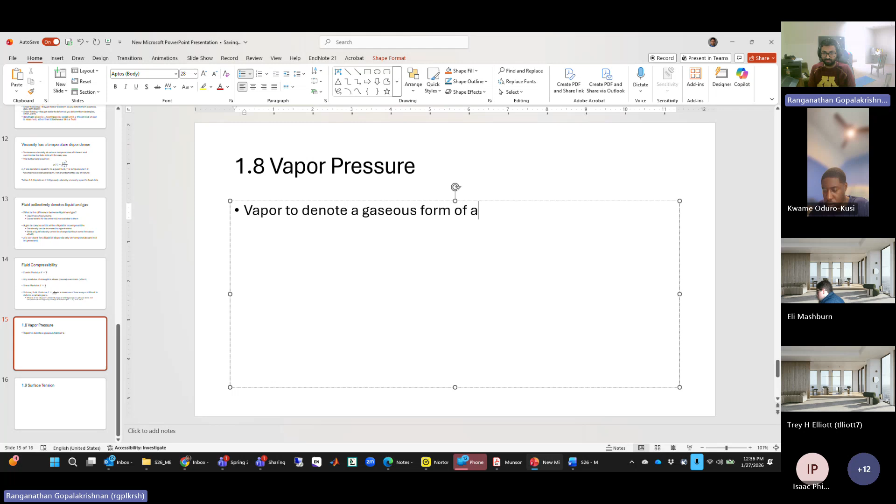What is vapor pressure? How do we think about this? There are some basic aspects about liquids and fluids that you should know, and vapor pressure is one of them. What is your most common interaction with vapors? Vapor is a term I specifically use to denote a gaseous form of a liquid, a gaseous form of a material very close to its condensation point, meaning it can go either way.

That is, if you have water and leave it out in the open, it's going to evaporate. But if you put a lid on it, what evaporates from the surface will rise to the lid and start condensing on it. So wherever it meets a surface, it just condenses back to being a liquid. It's in a very convertible form, where in one moment it evaporates, goes somewhere else, condenses, and becomes a liquid.

So it's not like nitrogen. You can store nitrogen, you can transport nitrogen, and it will remain a gas. Just putting it in a cylinder won't turn it into a liquid unless you take effort to cool it. But for water, it's easily condensable, it can evaporate. That's what we denote as a vapor.

Make sense? Okay, so when you talk about vapor pressure, some liquids are easier to evaporate and some liquids are much harder to evaporate. Can you agree with that? Can you tell me something that's very easy to evaporate and something that's very hard to evaporate?

Say gas is very easy to evaporate. What's easy? Gas. Gas is already a vapor, let's not talk about gases. Let's talk about liquids which can easily turn into a vapor or a gas. The distinction between vapor and gas is sort of pedantic—vapor can easily condense back, whereas gas is far from it, that's as much as that. My bad, I meant like gasoline, like petrol. Okay, gas as in American gas.

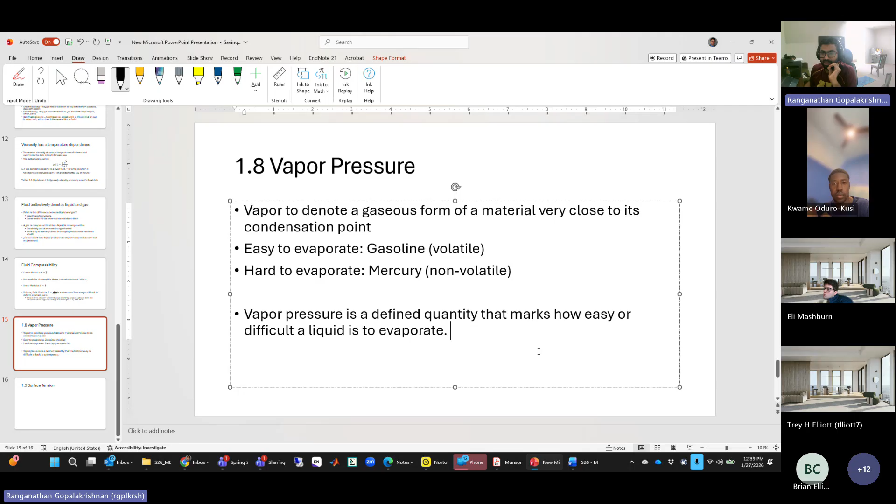Okay, and how do we define this? Let's say we think about a container where you have a liquid. If you put a lid on it very tight and leave no airspace, you will just have a liquid, nothing else. But if you leave some space—say you have a liquid, then some empty space, and then a lid—

What will happen is over time, the molecules on the surface start escaping and roaming around in this space. We call this space filled with vapor, which is basically molecules freely traveling around, as opposed to the liquid molecules trapped in the bulk liquid. That becomes the liquid, and the interface is sort of like a free zone—we call it the liquid vapor interface, where constantly liquid molecules escape and become vapor, and vapor molecules come back, condense, and become part of the liquid. So there is a liquid vapor equilibrium at the interface.

Okay, you're with me so far? We're almost there. Now, if you did an experiment with gasoline as your liquid, and one of you did an experiment with mercury as your liquid, and you both attach a pressure gauge into that space, the person who did it with mercury, what will you read as pressure?

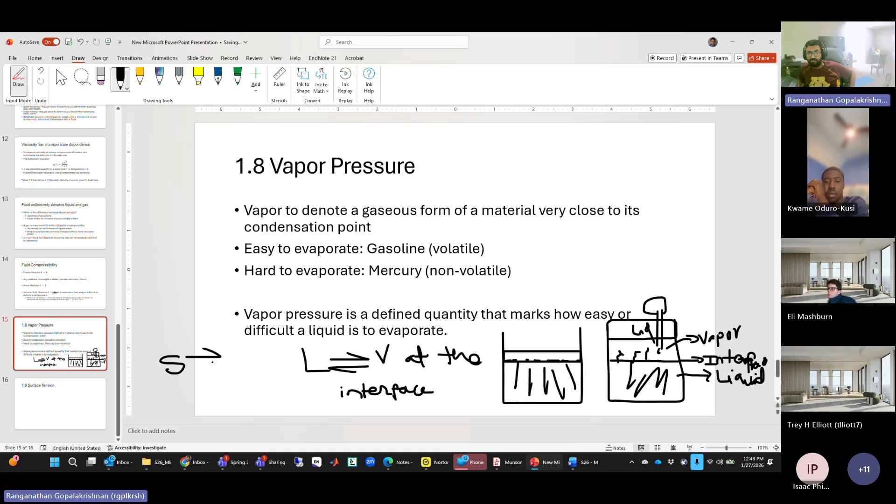You can define it the exact same way, just like there is a liquid-vapor equilibrium, there is also a solid-vapor equilibrium. So you take a piece of solid, leave it at the bottom, close the lid, and attach a pressure gauge. If it is a non-volatile solid, you will see nothing. If it's a volatile solid, you will start seeing vapor showing up as pressure. And the vapor pressure for solids as a function of temperature has also been tabulated, and you can look it up.

Okay, so to conclude this discussion: vapor pressure, PV, as a function of T, has been tabulated for both liquids and solids.

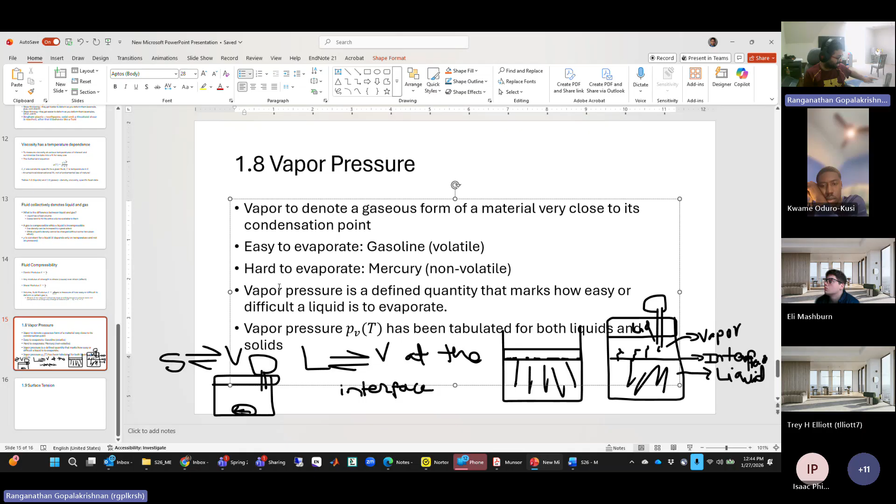Okay, I think I should stop here today. There is just still one more property called surface tension. It's not something we use a lot in this course, so I'm going to skip it. But I urge you to look at that section.